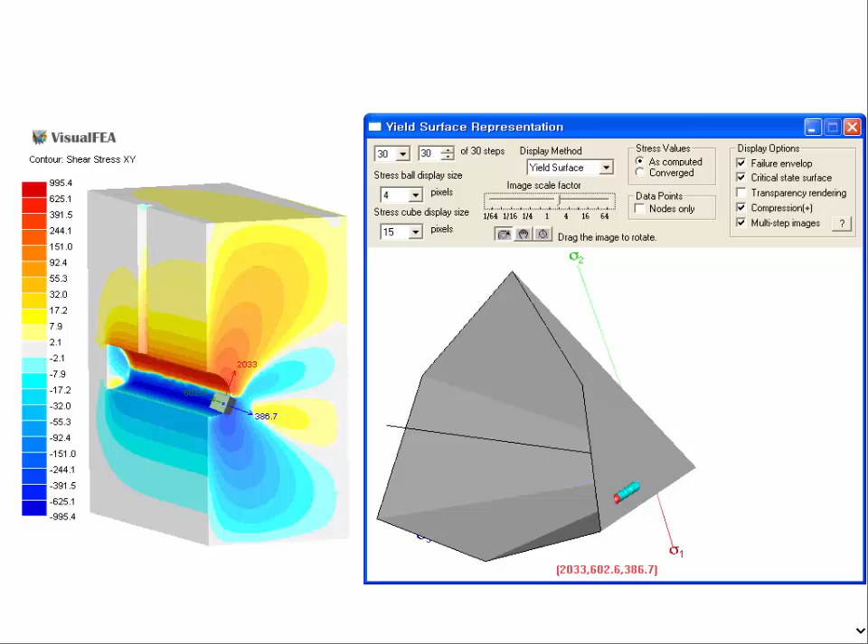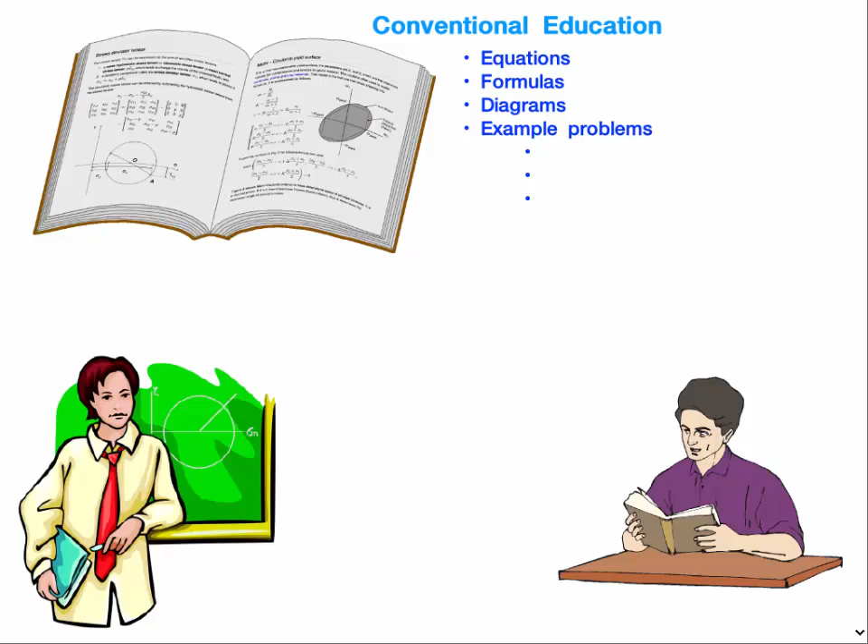Most textbooks of structural mechanics are full of equations, formulas, diagrams and example problems. There are a number of important concepts and procedures that should be mastered from these textbook materials.

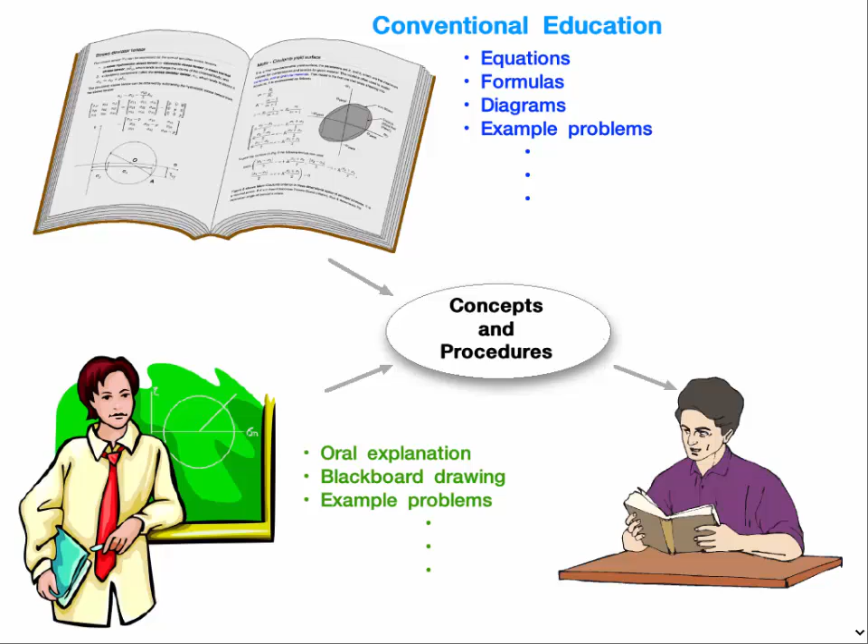Instructors deliver their knowledge and ideas to students through oral explanation, drawings on blackboard, and example problems. Accordingly, students study the subject by grasping lectures, reviewing textbooks, and solving example problems. This conventional pattern of teaching and learning may not be appropriate for the goal of mastering the concepts and procedures of the subject.

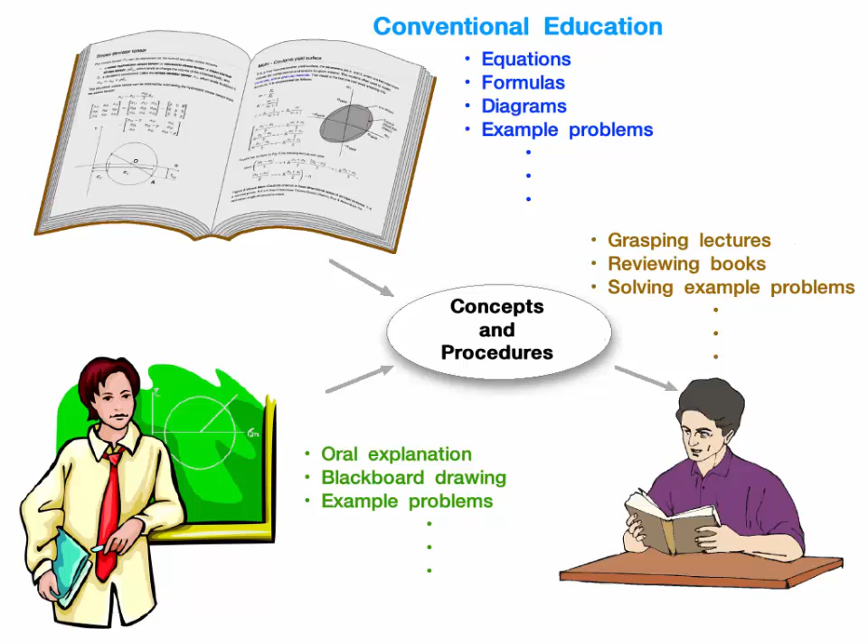The computer-aided instruction takes advantage of the fast computing capability, graphical visualization and user-friendly interface of modern computer technology. Instructors may make use of the facilities in presenting their lectures with instant problem-solving, data visualization and realistic simulation of structural behavior.

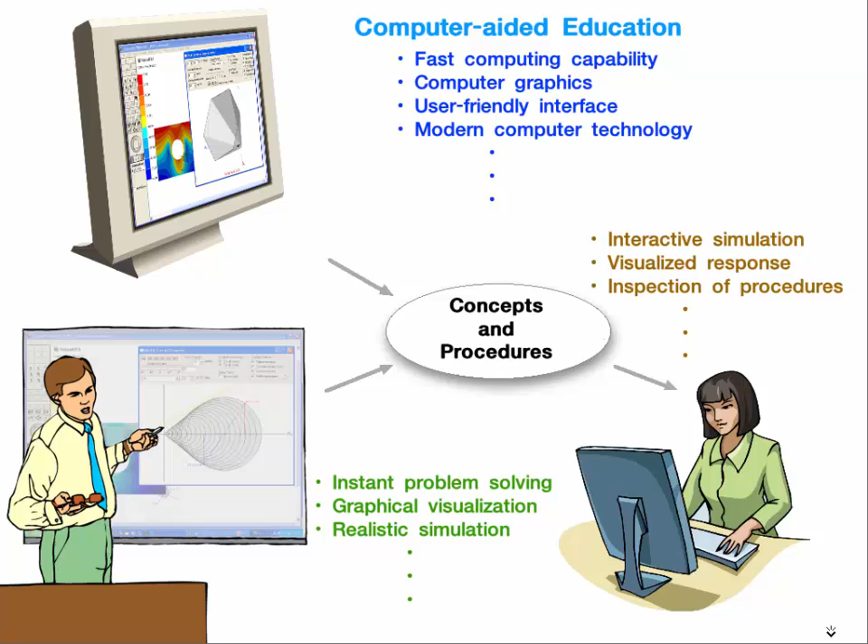Students also can easily access the facilities and manipulate interactive simulations, observe the visualized response, and inspect the computational procedures. Various experiences obtained using computer facilities may help students to gain better understanding and interest in the subject. Therefore, computer-aided education is an effective approach for enhancing the degree of understanding about the concepts and procedures in structural mechanics.

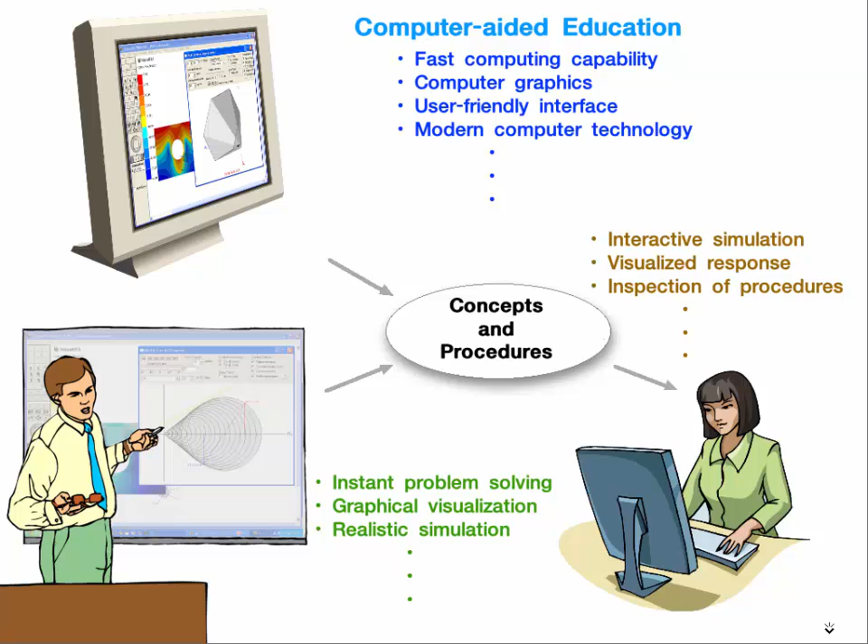VisualFEA is a finite element analysis software with a special feature for computer-aided education. The software is a monolithic program integrated with all the ingredients of finite element analysis for structural, geotechnical, heat transfer and seepage problems. The current version covers the education of two subjects, structural mechanics and finite element method.

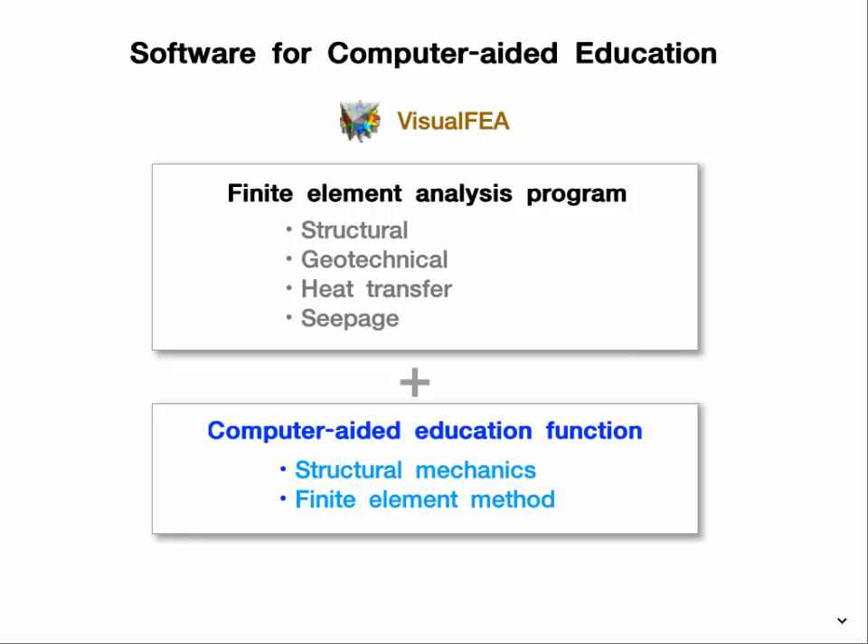Its implementation is based on the intrinsic components of finite element analysis, namely, element modeling, equation assembling and solving, pre- and post-processing, and other user interfaces. The components are reorganized into educational features such as visual representation of concepts, indication of mathematical relationship, interactive operation of computing process, experiment with data manipulation, and simulation of model behavior.

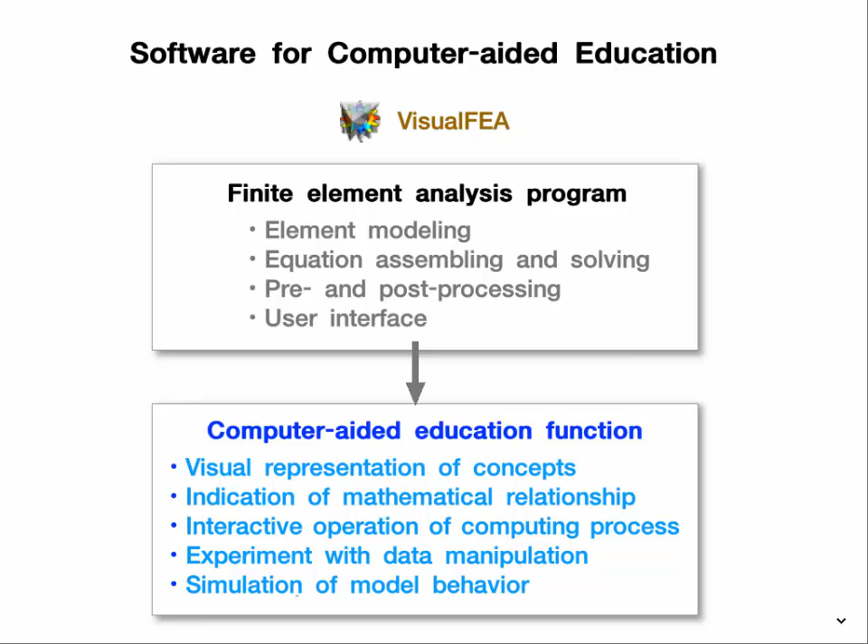The educational functions available in the current version are classified as topics in two subjects: structural mechanics and finite element method. The topics related to structural mechanics include the following items: mathematical relationships in structural members, relationship between internal forces and stresses in structural members, force application and resulting structural behavior, Mohr's circle, yield surface, influence line, moving load, and buckling modes of structural members.

The topics related to finite element method include the following items: element equations and stiffness matrix, assembly and solution of global stiffness equations, shape functions and interpolation, stress recovery and smoothing, eigenvalues and eigenvectors of stiffness matrix, dynamic modes and vibration analysis, adaptive analysis procedure. More topics and subjects will be added in the future versions of VisualFEA.

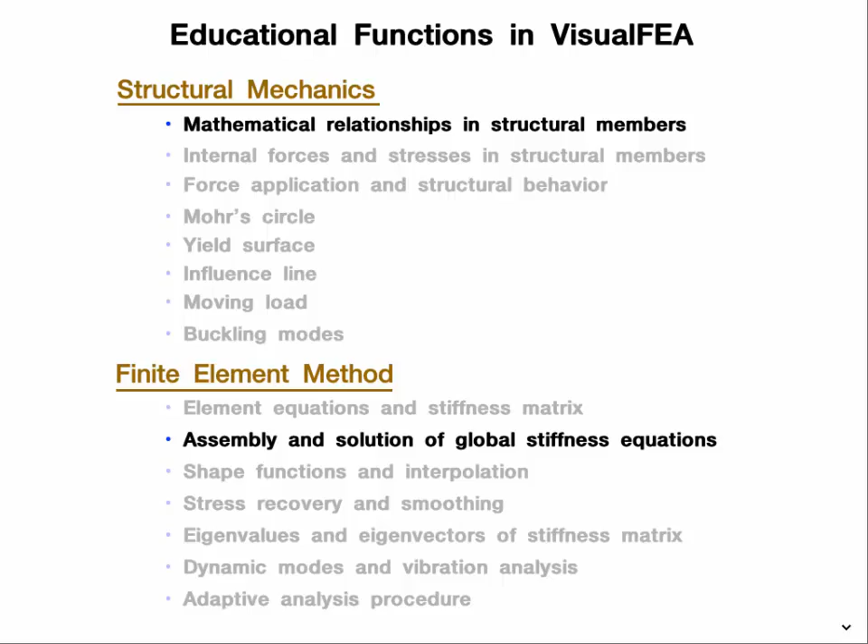However, this presentation introduces briefly only two of them, distinguished by black letters: one topic from structural mechanics, and the other from finite element method. The usages of the functions listed here are fully explained in screen demos prepared for each of them.

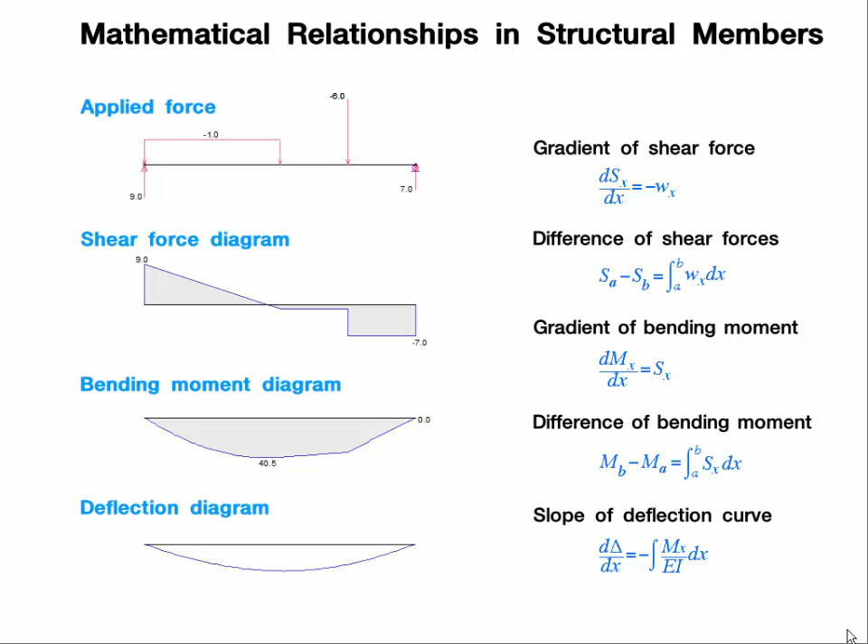The first topic is the mathematical relationships in structural members. There exist mathematical relationships between external force, shear force, bending moment and displacement. The relationships are graphically manifested, and can be examined through interactive operation of the diagrams.

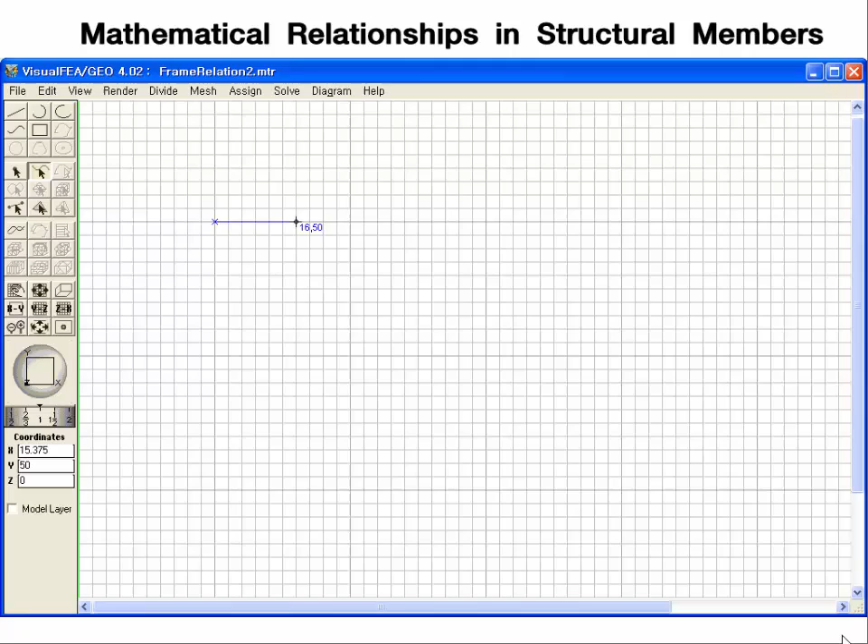Let's take an example of a continuous beam with 3 spans. The image shows the first screen that appears at the start of a 2-dimensional frame analysis. A 3-span beam can be modeled simply by clicking grid points. Then, material properties and member sections are assigned to the model.

The nodal boundary constraints are defined as a roller or hinge. Lastly, the external forces are applied to the beam members. Now, the results of the beam analysis can be represented by diagrams, using the diagram menu items: shear force diagram, bending moment diagram, and deflection diagram.

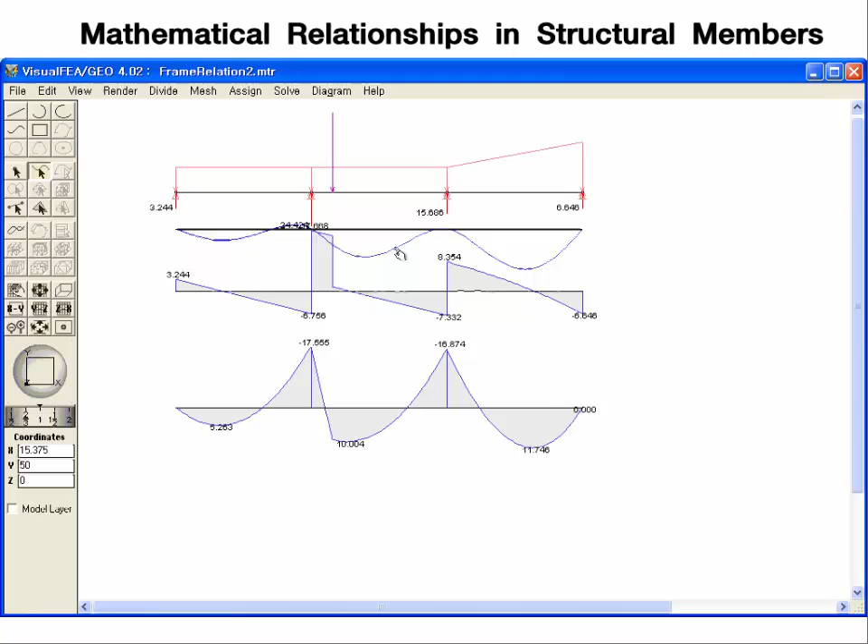Multiple diagrams can be displayed simultaneously by overlaying them. Each of the diagrams can be dragged independently and separated from the overlaid image. Now, we will observe the relationship between diagrams. If you place the screen cursor at a point on the shear force diagram, a yellow tip box shows the information about the shear force at the position.

If you click the point, there appears a green line connecting the applied force diagram and shear force diagram. It is indicated in the 2 diagrams that the shear force at the point is equivalent to the summation of the forces on the left side of the green line. At the same time, the line tangent to the bending moment diagram is drawn, and it shows that the slope of the tangent line is equivalent to the shear force.

If you drag the green line, the value of the shear force changes, and the indication of the relationship is updated instantly following the green line. The slope of the bending moment diagram is also updated. If you click another point on the shear force diagram, there appears a new green line. Now, there are 2 green lines.

It is indicated that the difference of the shear force between the 2 green lines is equivalent to the summation of the forces between the 2 green lines. This represents the mathematical relationship between the external forces and shear forces.

As you move any one of the 2 green lines, the representation of the relationship is also updated instantly, following the movement of the green line. It is also indicated that the difference between the slopes of bending moment diagrams at the 2 points is equivalent to the difference of the shear force. This implies the mathematical relationship between the shear force and bending moment.

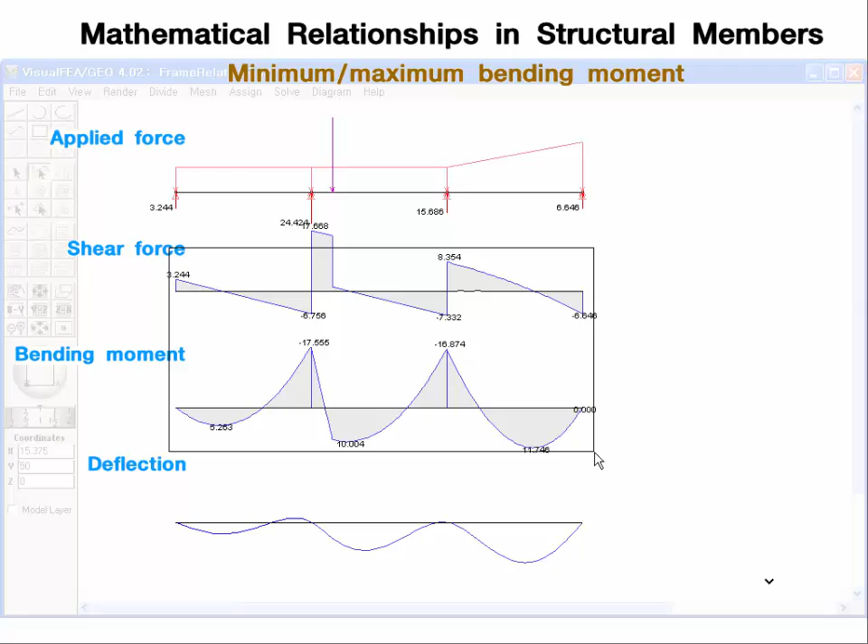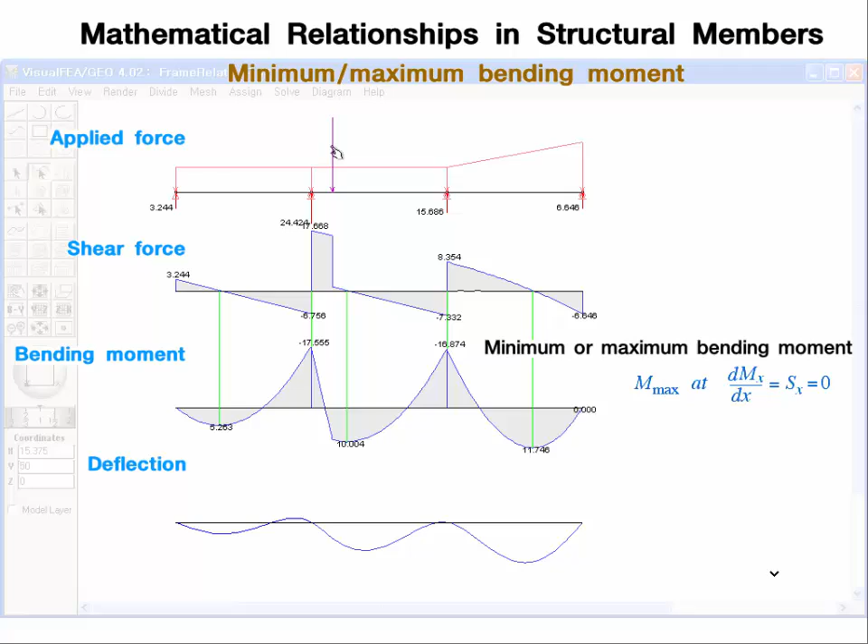In order to observe this relationship, select the shear force diagram and bending moment diagram at the same time by rubber band selection. Then, there appear green lines connecting the 2 diagrams. The green lines connect the 0 crossing points in the shear force diagram and the corresponding points in the bending moment diagram. These are the points where the first derivative of bending moment, as well as the shear force, falls to 0, and accordingly the bending moment reaches the local maximum or minimum.

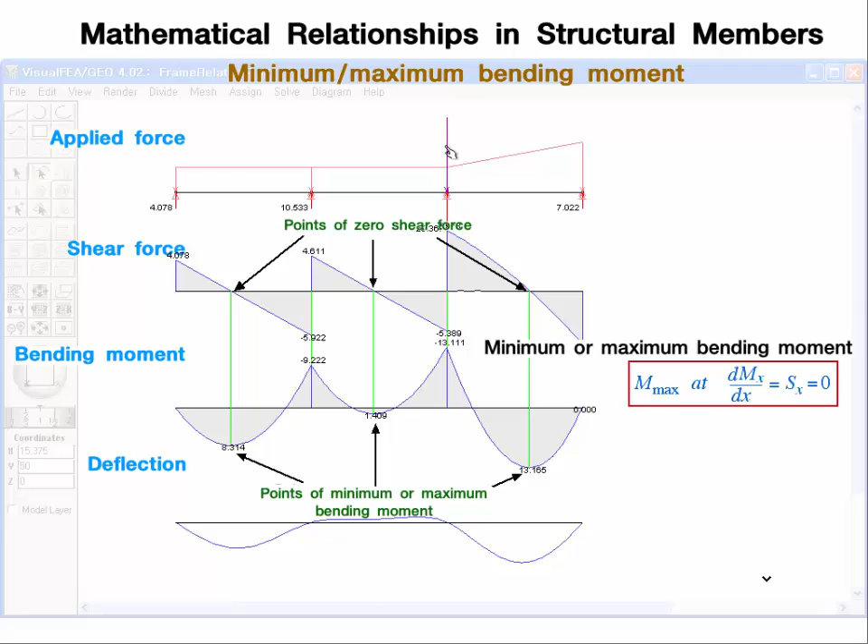If you move the applied point force, all the diagrams are changed simultaneously, and the green lines are moved in accordance. However, the green lines always pass through points of 0 shear force and points of minimum or maximum bending moment. The next observation is the relationship between the 0 bending moment and the deflection curve.

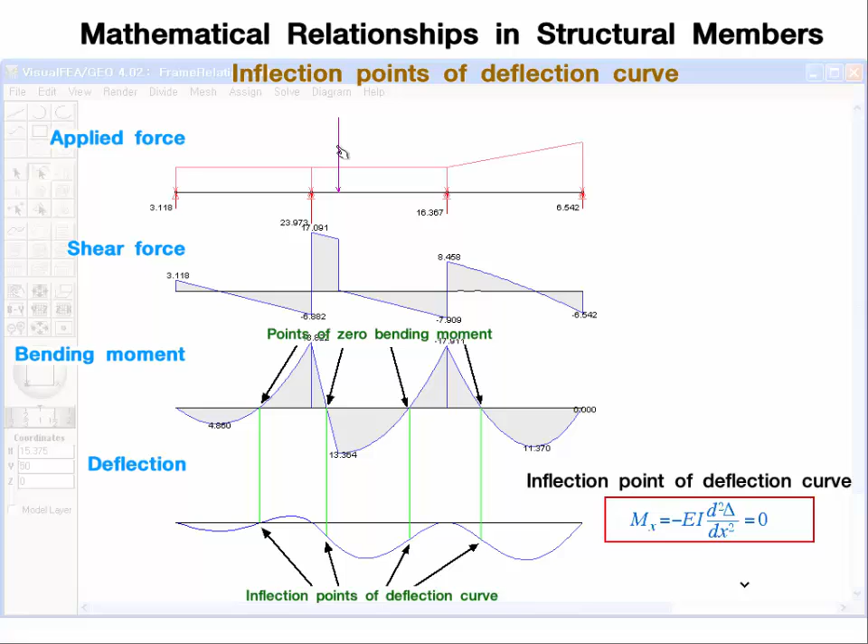In order to observe this relationship, select the bending moment diagram and deflection diagram at the same time by rubber band selection. Then, there appear green lines connecting the 2 diagrams. The green lines connect the points of 0 bending moment in the bending moment diagram and the inflection points of the deflection curve. Again, while moving the applied point force, the diagrams and the positions of the green lines are updated instantly. The green lines always pass through points of 0 bending moment and inflection points of the deflection curve. These are the points where the second derivative of deflection falls to 0.

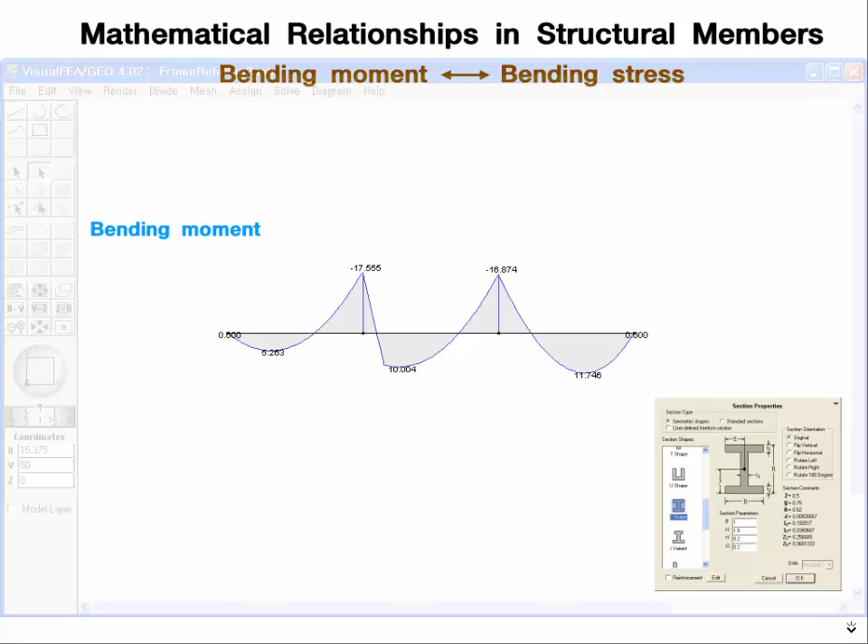The internal stresses in structural members are evaluated from the internal forces such as axial force, shear force and bending moment. The bending stress can be computed only in the case the geometry of the cross-section is specified. This is an image of bending stress overlaid with the bending moment diagram for the 3-span beam. The bending stress is computed from the bending moment using the formula, applying the cross-sectional geometry of the beam.

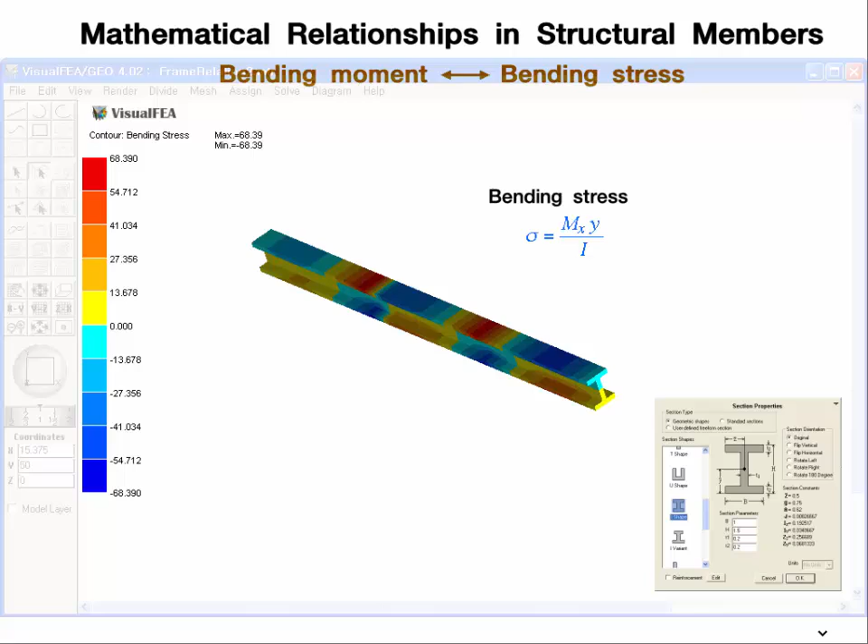The stress image can be rendered in 3-dimensional view. The geometry of the assumed cross-section is applied in this 3-dimensional rendering. If you click a point on the stress image, a new window opens, with the image of the cross-sectional stresses at the point.

Dragging the cursor along the beam spans refreshes the image of bending stress for the updated cross-section at the cursor point. If you place the cursor over the cross-section image, a yellow tip box shows the value of the bending stress and y distance from the neutral axis.

As an educational exercise, the displayed numerical values can be confirmed, using the formula to compute the bending stress from bending moment. This was a brief introduction about the educational function related to mathematical relationships in structural members. More detailed explanation can be obtained from the screen demo about this function.

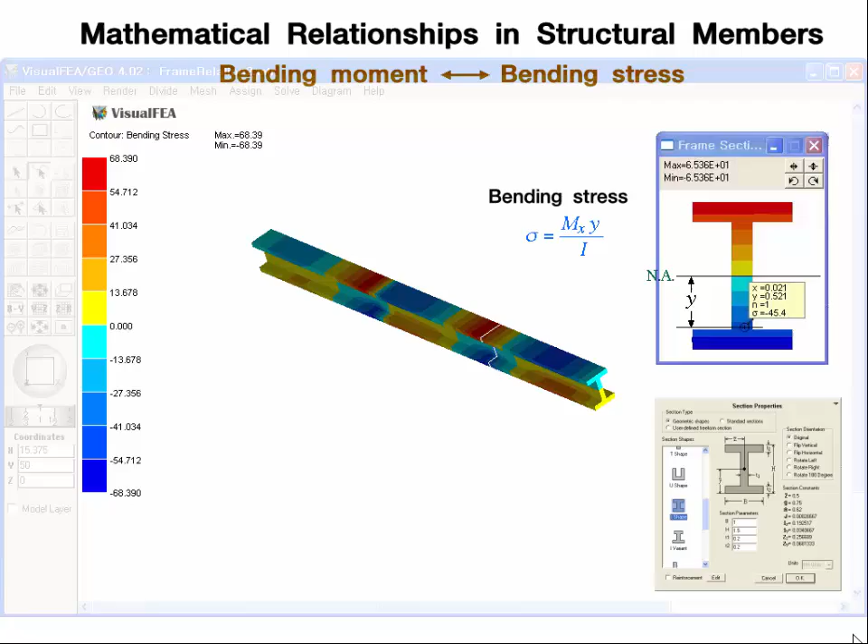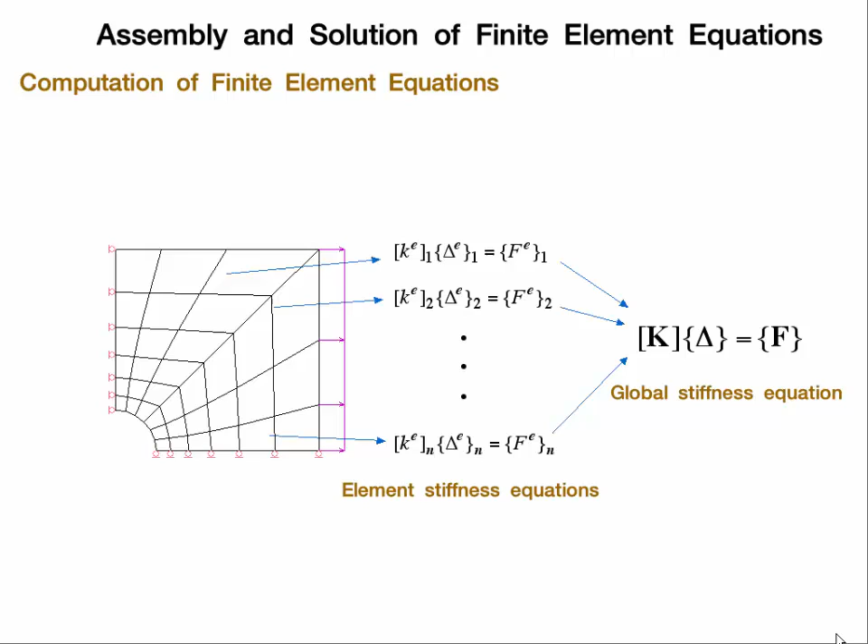The next topic of the educational function is concerned with finite element method. The function is intended to examine and simulate the overall procedures of computing element stiffness equations, assembling them, and solving the system equation. If you select an element from the finite element mesh by a mouse click, there appears a list box window with information about the element stiffness matrix.

The window contains the computational details of the matrix, arranged in a hierarchical tree. The contents can be expanded or collapsed by clicking the small triangular buttons. The first item shows the geometry of the element, with the nodal coordinates. The second item is the properties assigned to the element, and the resulting constitutive matrix.

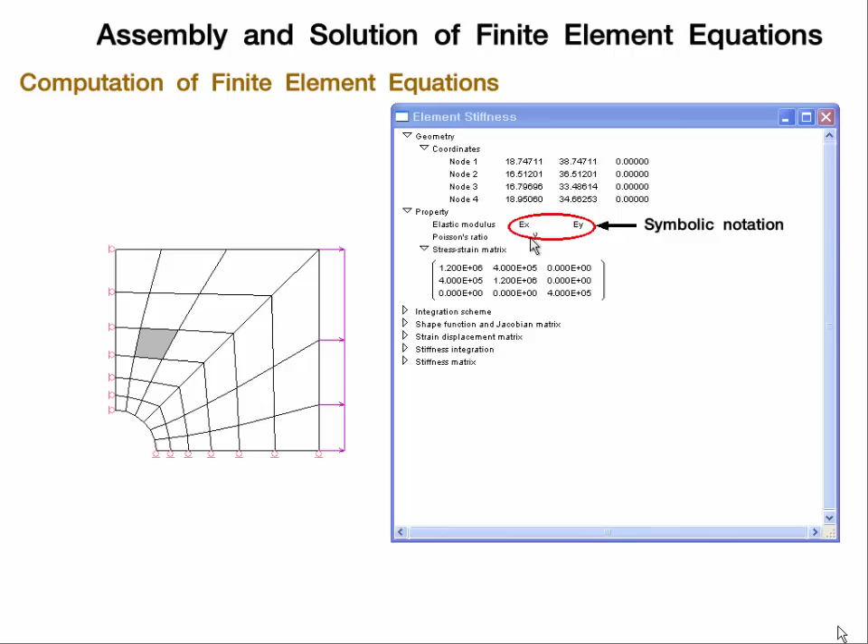Each of the data items can be switched between numerical and symbolic expressions by clicking the item. The contents of the matrix can also be displayed symbolically using mathematical expressions. The next item shows the numerical integration scheme, including the integration weight, natural coordinates, and Cartesian coordinates of each integration point. The shape functions and their derivatives can also be expanded with the Jacobian matrix and its inverse.

This example shows switching the Jacobian matrix into symbolic expression. You may expand the strain nodal displacement relationships and numerical integration of the stiffness matrix for each integration point. The last item is the element stiffness matrix, obtained by summing the values of all integration points.

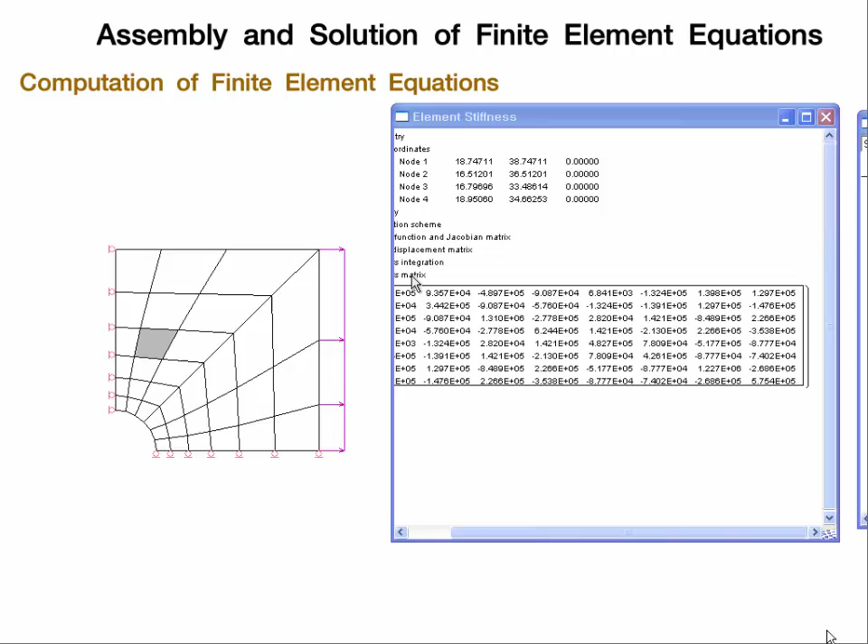The element stiffness matrix is assembled into the global stiffness matrix, entries of which are represented by small squares. The red squares in the global stiffness matrix represent the entries with assemblage of the element stiffness matrix. The nodal degrees of freedom associated with the assemblage can be identified in both element and global stiffness matrix.

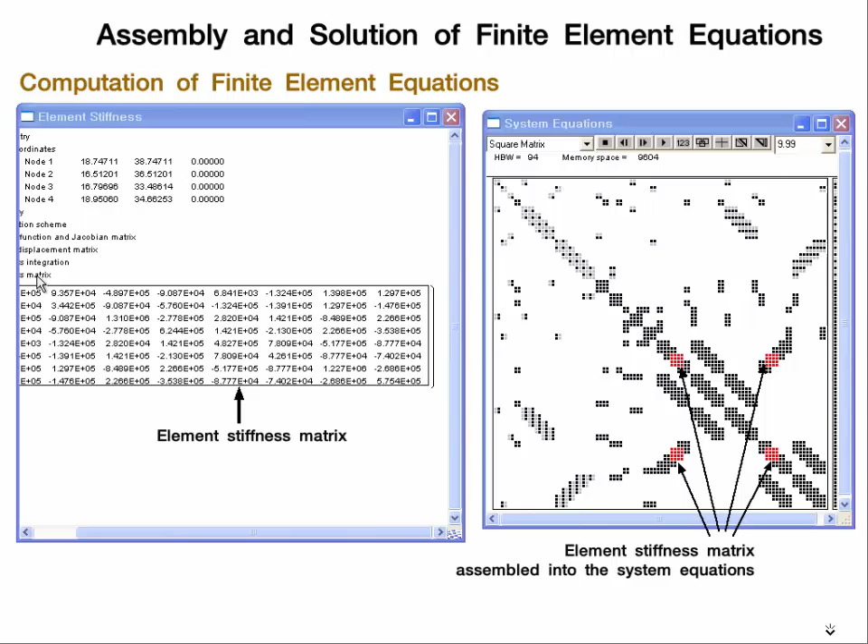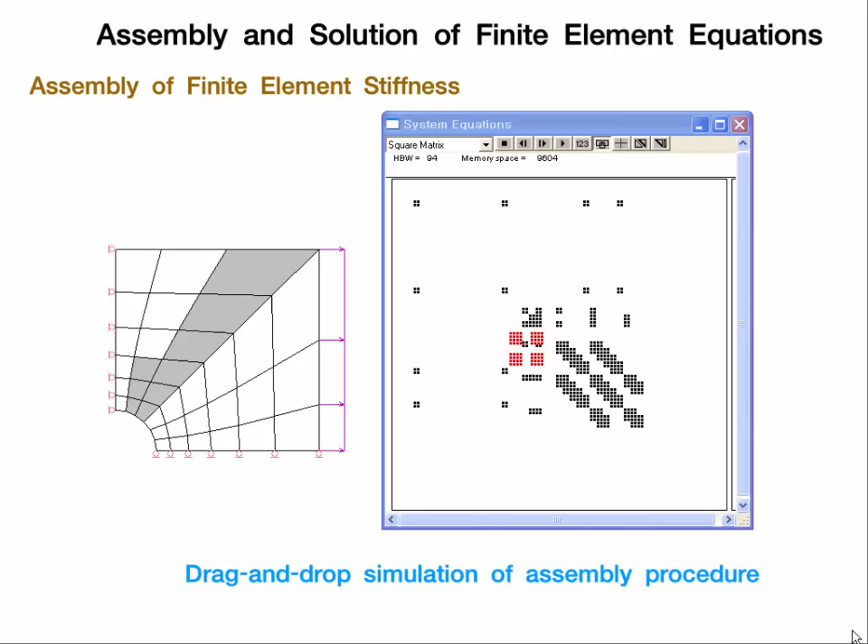If the manual assembly button is pressed, the process of stiffness matrix assembly can be simulated manually by drag and drop operations. Click an element from the mesh, drag the element, and drop it in the global stiffness matrix. Then, the element image turns into squares representing matrix entries. The entries are spread and assembled into the matrix. If the numeric mode button is pressed, each entry is represented by its numerical value instead of a square. The hidden part of the matrix can be accessed using the horizontal or vertical scroll bar.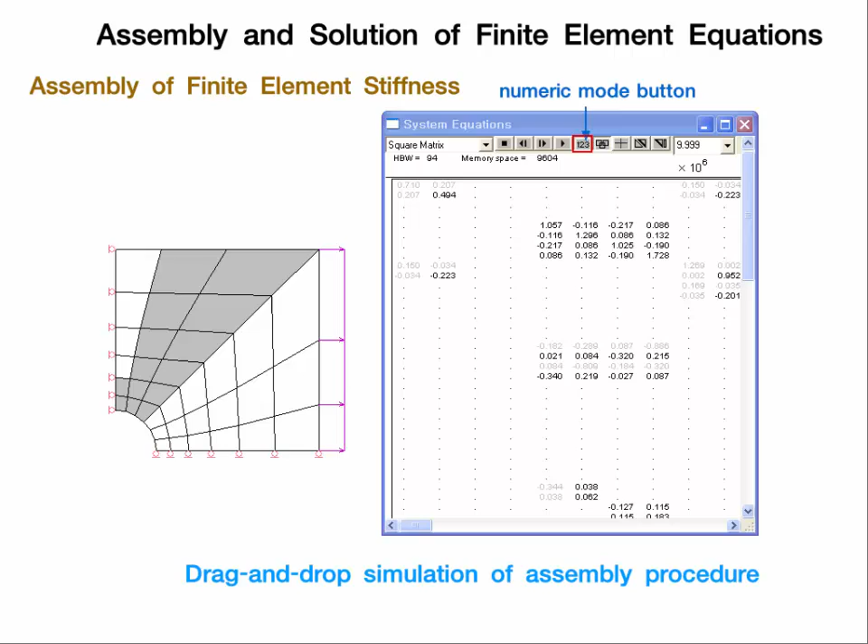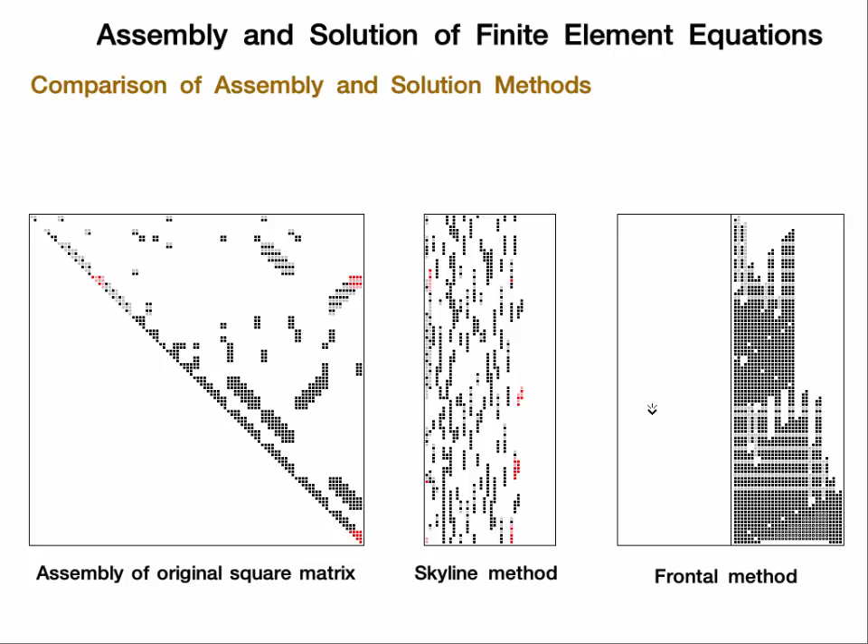The assembly of system equations can be simulated in 3 different schemes, namely, square matrix, skyline and frontal schemes. The original square matrix is represented by its upper triangle for comparison with other schemes. Each of the assembly schemes can be examined through simulation in manual or automatic assembly mode. Here, only the frontal scheme will be illustrated in more detail.

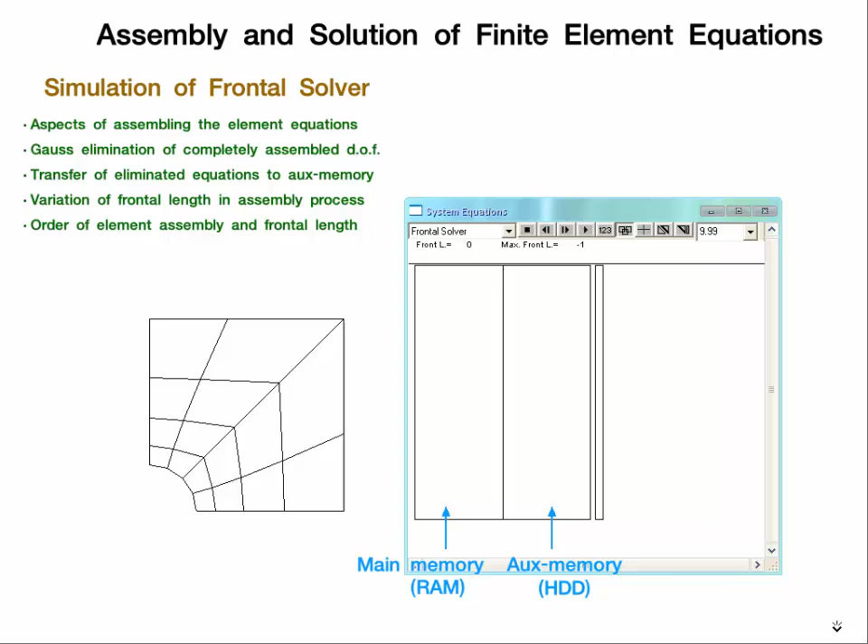The data storage for this scheme is divided into 2 parts, that is, the main memory and auxiliary memory. The assembled stiffness matrix and force vector are stored in the main memory, and the Gauss eliminated equations are stored in the auxiliary memory. The assembly process can be simulated either automatically or manually.

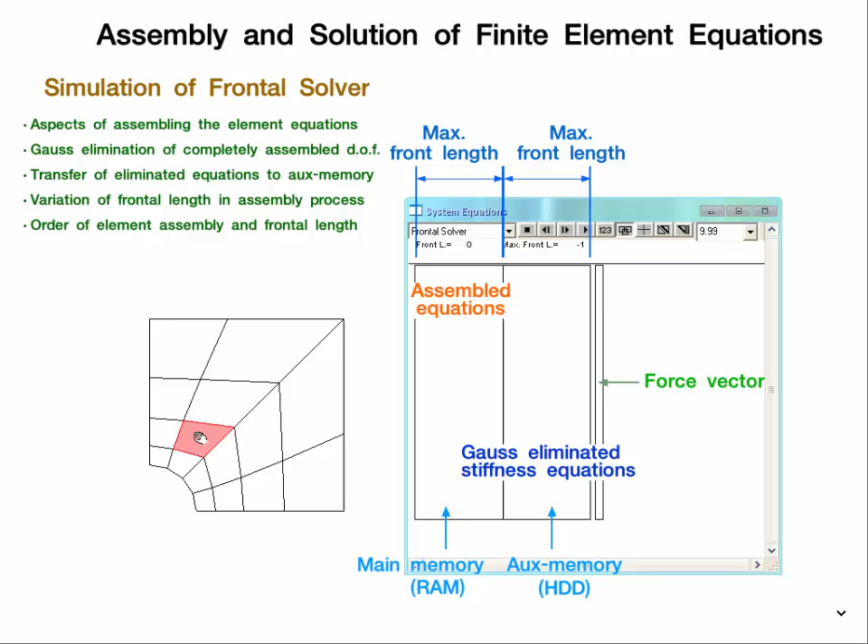The manual simulation is useful in observing the characteristics of maximum frontal length, which is the factor determining the memory requirement and computing time. Select an element and assemble the element matrix into the global stiffness matrix in the main memory by drag and drop operation. As more elements are assembled, the frontal length changes.

Once there appear degrees of freedom with complete assemblage, the corresponding rows and columns of the matrix go through Gauss elimination. The data for eliminated entries are moved to the auxiliary memory, and the space of the eliminated entries is vacated for next assemblage. The assembled degrees of freedom are increased by a new assembly, or reduced by Gauss elimination. Thus, the frontal length fluctuates while the assembly is going on.

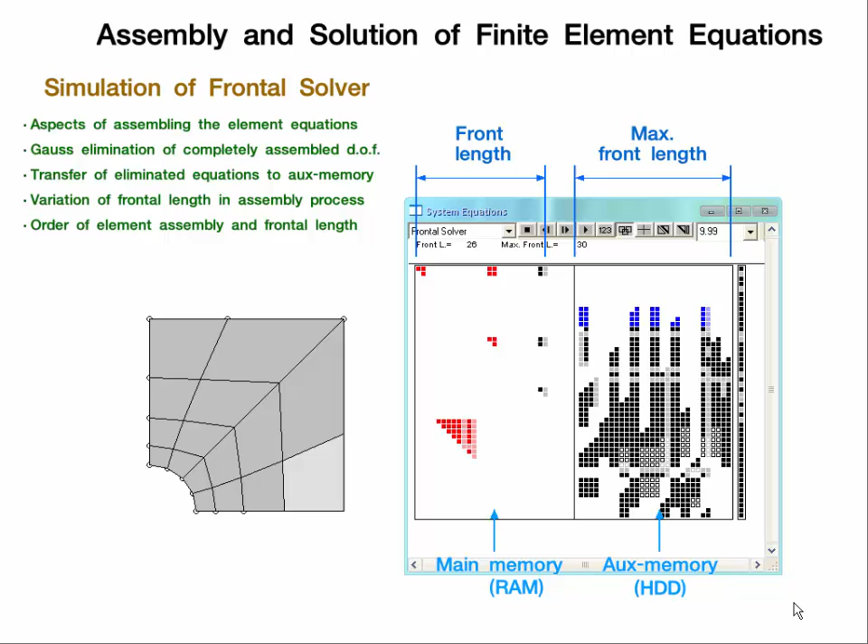The element for assembly can be selected in arbitrary order. Through a few trials with different order of assembly, we can easily notice that the maximum frontal length depends on the order of element assembly. Similar experiments can be made also for the cases of square matrix and skyline assembly. In these cases, the memory requirement is determined by the half bandwidth, which varies depending on the node numbering.

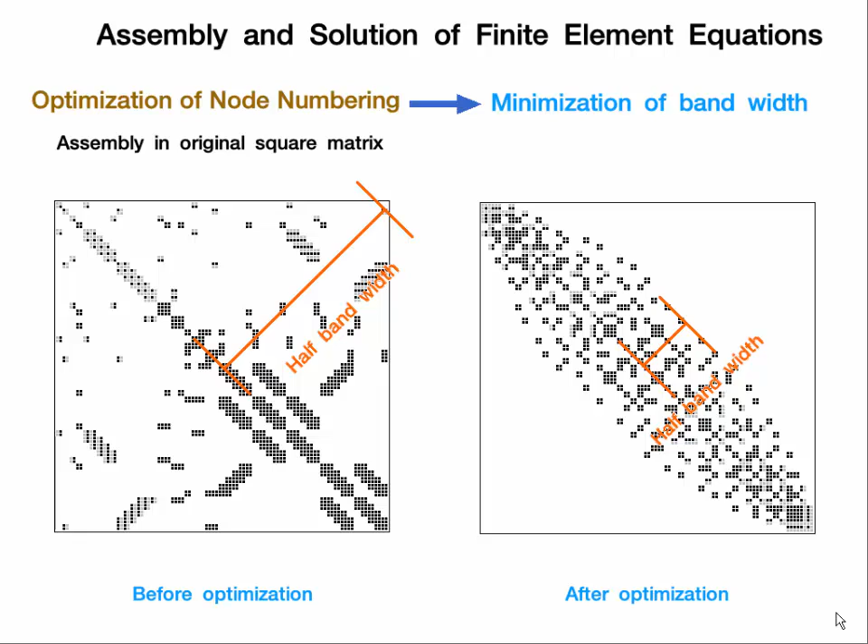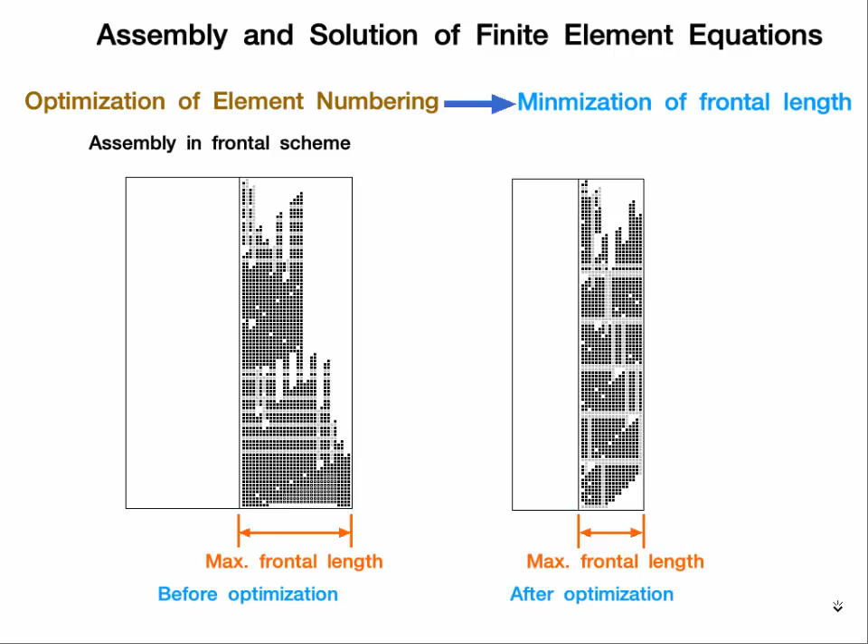Thus, this educational function is useful in understanding how the half bandwidth is affected by the node numbering, and how the maximum frontal length is determined by the element numbering. This was a brief introduction about the educational function related to computing and solving finite element equations. More detailed explanation can be obtained from the screen demo about this function, with examples of frame analysis and plane stress analysis.